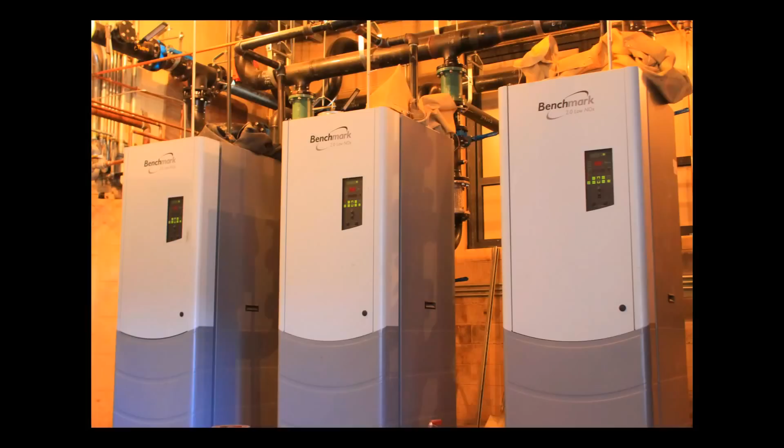We've recently completed or are about to complete what we refer to as Phase 5. Phase 5 is composed of a new track and football field complex at Coy Middle School, and improvements to Main Elementary School. Those improvements were both security and mechanical in nature. They provided a new secure entrance at the office, an improved drop-off sequence at the front of the building, as you've likely noticed, and a boiler replacement to make that building much more efficient to operate.

And finally, the improvements at Parkwood Elementary School. At Parkwood, we constructed an office addition, which enabled us to provide secure entry, just like what we've done at all of the other schools in the district. So we have a much more secure entry sequence at that building.

In Phase 6, we are about to embark upon, it's composed of four main pieces, and I'm going to walk you through those. They are the connector at the Beavercreek High School campus, dugouts and storage facilities at the Coy Middle School campus, a gymnasium addition at Shaw Elementary School, and a new preschool building to serve the district.

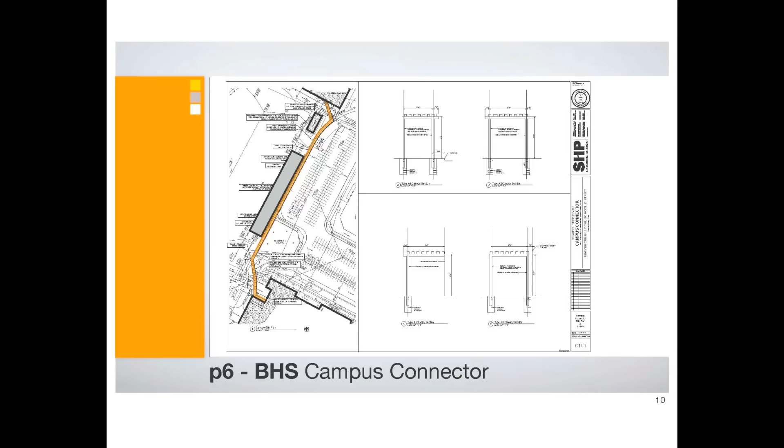The first piece of that is the campus connector. You can see here it runs between what is now Ferguson Hall, down along the football stadium, and into the main high school building. It's going to enter the main high school building back near where the music wing is. That's just going to be an open air connector—it'll be a roof with columns. It won't keep you warm or cool, but it will keep you dry, and that's the intent here.

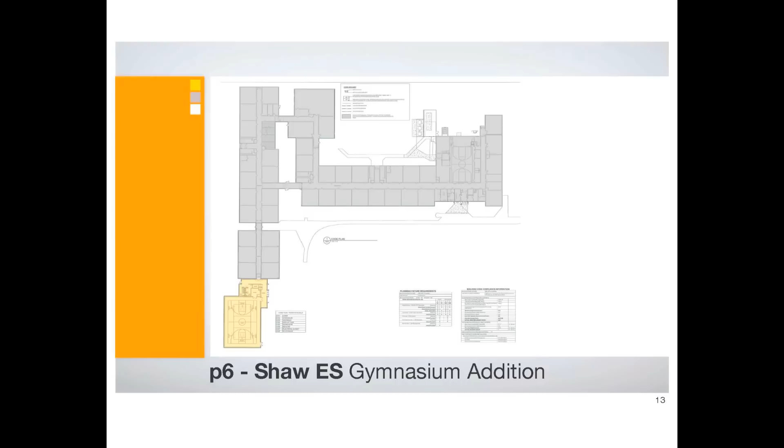If we take a closer look, you can see that not only are we adding a gym, but we're also adding restroom facilities onto the end of what is currently the third grade wing. The nice thing about adding the restrooms is that it allows the district the opportunity to open this building after hours or on weekends for community use, but still have the remainder of the school building secured. So it should be a really nice environment, not only for the community, but also for the staff in this building. From the outside, this is kind of what it's going to look like.

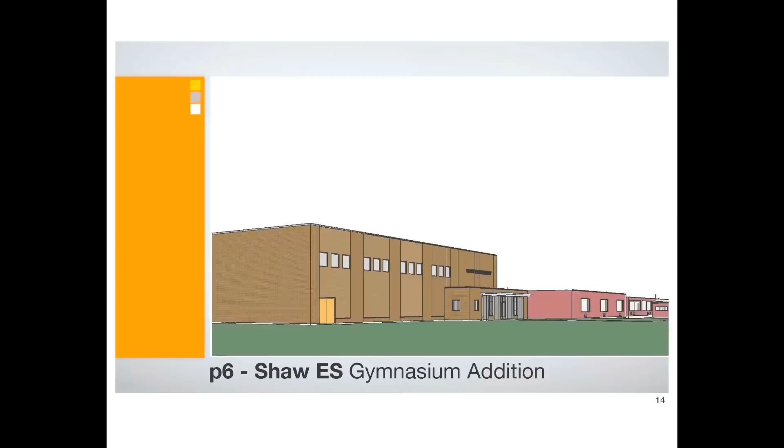We're working hard to make it match the existing facility. You may recall the entrance to Shaw has a lot of glass and stone piers, and you can see in the addition that we are using that same kind of vocabulary, these stone piers with large windows, to really help tie it in to the rest of the campus, make it feel like it's always been there. So that's the Shaw Gymnasium.

The next piece, and the most significant piece of Phase 6, is the preschool. The district has decided to proceed with all-day kindergarten. To deliver that, they've got to relocate the preschool from Parkwood Elementary School to make way for those kindergarten students. So when the board began talking about this, the obvious question becomes, where do we put this new preschool? So we began looking at the elementary campuses throughout the district, and the first few we considered were Fairbrook, Main, and Parkwood.

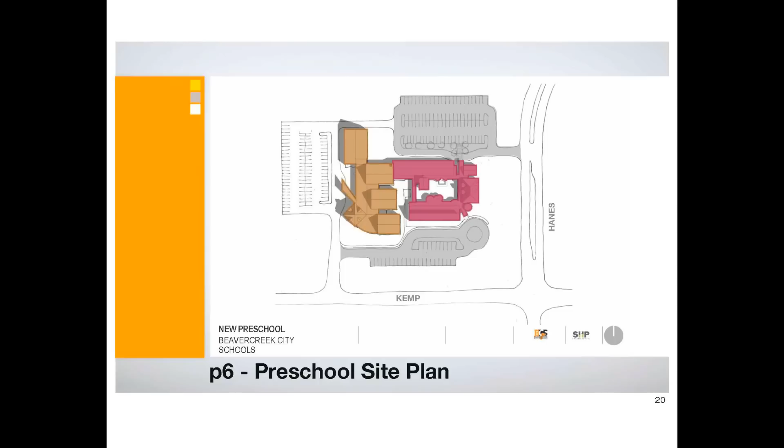If we zoom in a little bit on the preschool addition, you can see here in the upper left is where we actually connect to the existing Board of Ed building, and there will be a doorway from the preschool into the pupil services department of the Board of Ed.

I mentioned that we have an outdoor learning and play area in this courtyard. The administration was concerned about the safety of students in more outdoor or exposed playground locations, so we wanted to take advantage of this courtyard and create the play and learning space in there.

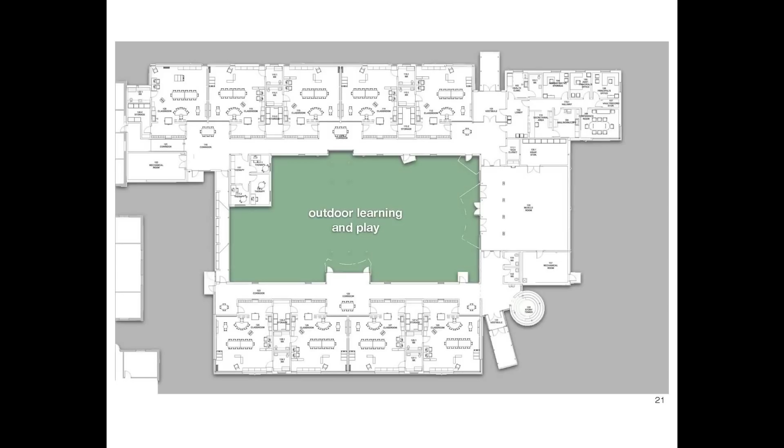The building will also have 9 classrooms. Each classroom will have its own toilet room, as well as direct access to a storage room.

This large blue space in the middle is what we call the large motor room. This being a special needs preschool, oftentimes we'll have students who have challenges regarding mobility or just getting around, and this is a place to practice, a place to get more familiar with how your body works, how you move, how you can move better.

There's also a separate therapy space for pull-out instruction and testing to provide specific services to meet a student's specific needs. Up here in the upper right is the admin or office area, right next to the main parent entrance.

And finally, there's this little round story tower on the bottom right, which will help mark and identify the bus entrance on the south side. It's a great place to take your class, kind of huddle up in this room, read a good book.

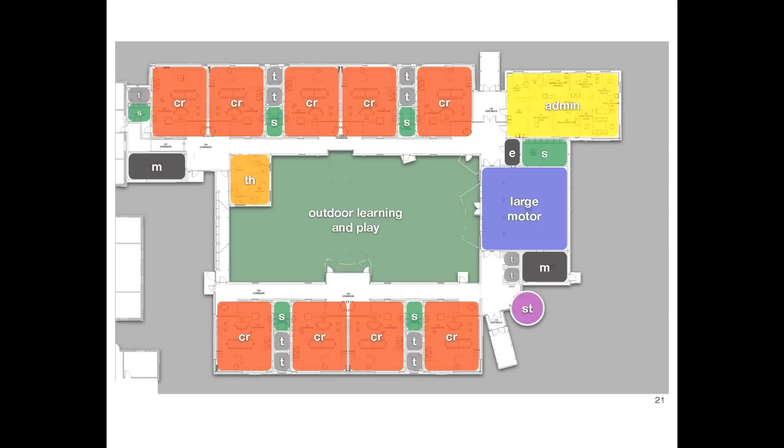And finally, there's obviously the mechanical spaces that will help this building function from a mechanical and electrical perspective. So that's how the building is organized.

You're probably wondering what this really looks like. When the Board of Ed building was constructed, there was a lot of conversation about making it compatible with the community around it, making it fit. So it's got what we would refer to as a lot of residential forms and scale.

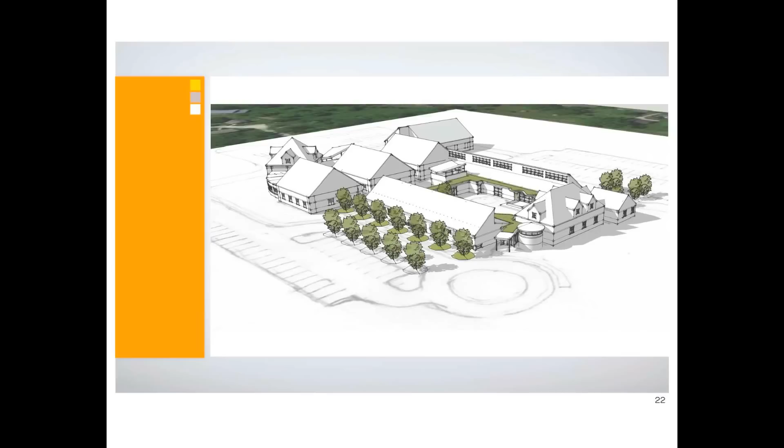From a material perspective, we're working hard to work with the palette that's already in place, both with color and materials. So we're going to have brick on the building that will match. The colors will be sympathetic. It should blend in really, really nicely.

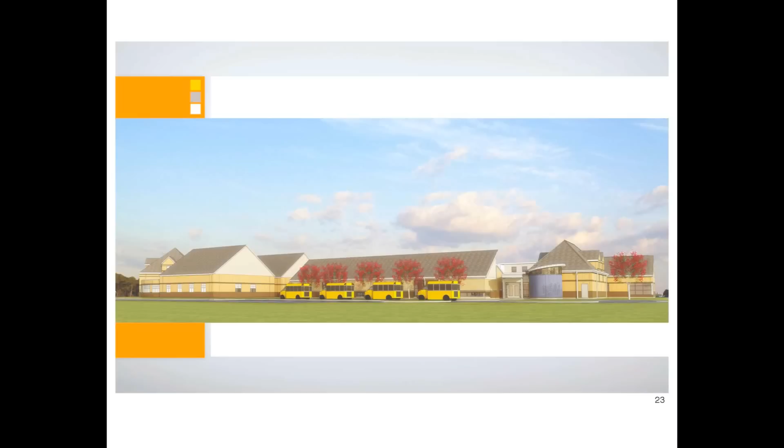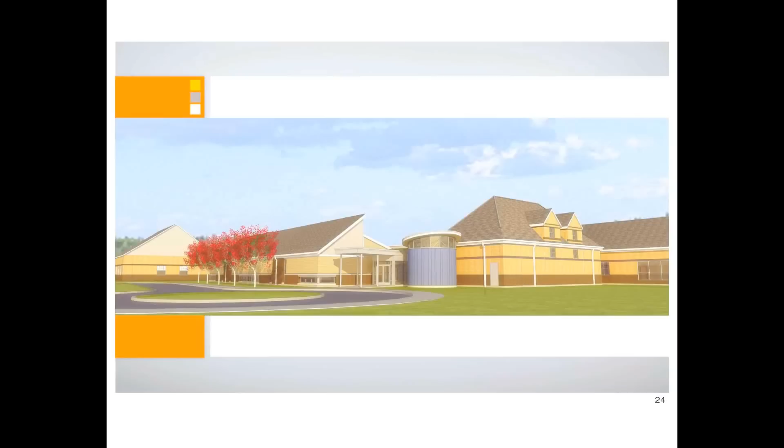You can see here, this is kind of a view from that intersection at Haynes and Kemp. As we move in a little closer, the classroom wings come into view, and finally the main student entrance there on the south side.

From a schedule perspective, our intent is to do the vast majority of this work during the summer. The connector and the dugouts and storage will be completed over the course of the summer. The Shaw Gymnasium, because it's a little larger, is going to have to straddle the summer, so we hope to be starting that soon and completing it in October or November of the fall of next school year.

And the preschool, obviously much larger than any of them, is going to take longer to build. So we will be wrapping that up in spring of 2015, ready for occupancy in fall 2015.